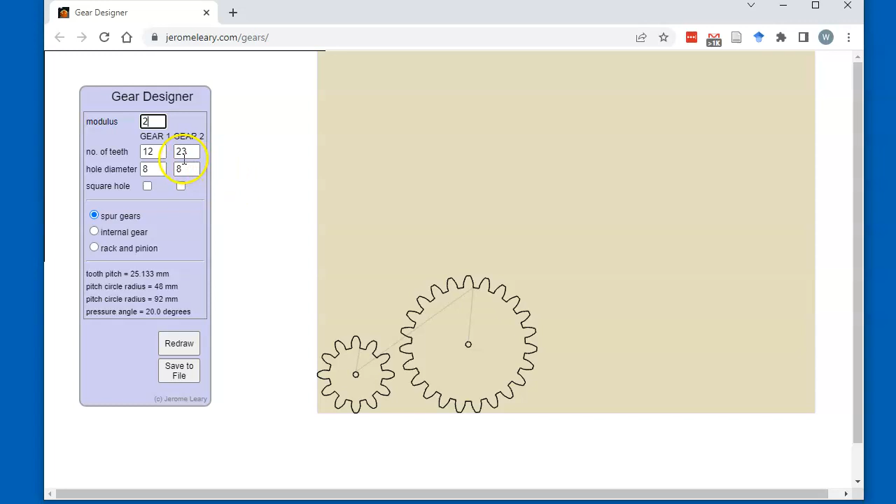I'm going to do a gear with 24 teeth, and I'll put the hole in the middle at 4 millimeters, which matches the hole size for a number of different motors. You can do spur gears, internal gears, or rack and pinions.

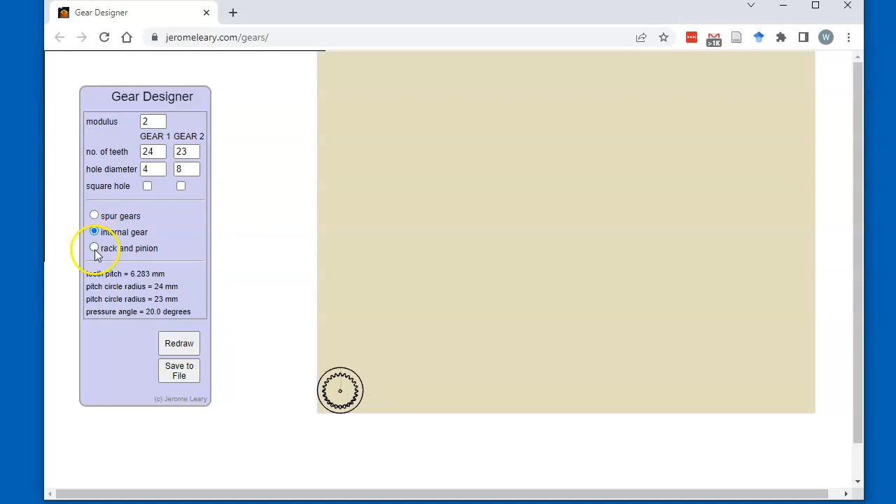So we're going to do spur gears, and let's just zoom in a little bit so we can see our gear. Because I only want to do one gear, I'm going to set this second one to 0 teeth, which makes that gear disappear.

Now my gear shape is all set, and I can save it to a file, saved as a DXF file. I just noticed that the second gear still has the hole in it, so let me change the hole diameter to 0 on that second gear.

Now that second gear completely goes away, so I'll resave it to the file, and then go ahead and rename that gear.dxf.

If you want, you can take a look at your DXF file. In this case, I'm using the application eDrawings and opened up that file, now renamed to gear.dxf, and it looks pretty good - you can see the involute tooth shape.

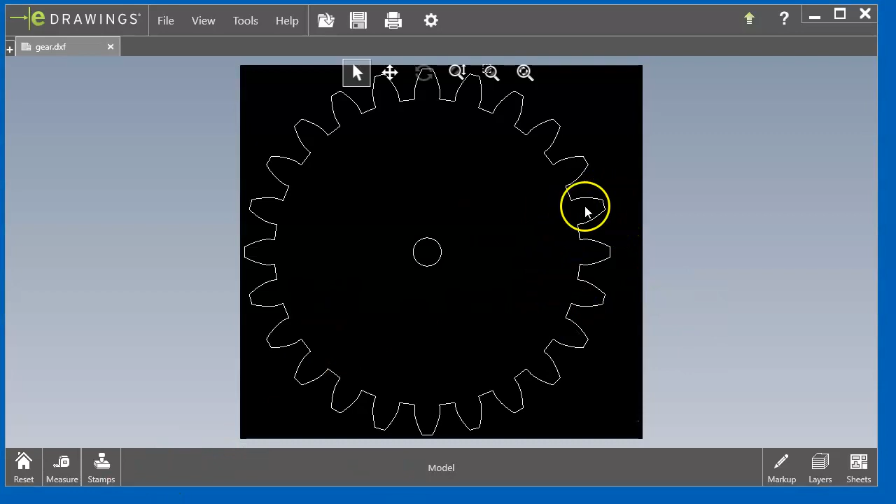If you go ahead and measure the diameter of the hole, you'll see that it's diameter 4 inches. That's because it doesn't yet know that we're thinking about millimeters rather than inches. So when we go to Creo, we'll have to change the default units to millimeters.

Now we're in Creo, so the first thing we're going to do is set the working directory. I've got that file in a directory called Gear Demo, so I'll set that to be the working directory.

And then you can see that gear.dxf in the file. We're going to go ahead and open and look for DXF files, and the gear appears, so we'll click on that and then import.

For the import new model, there's a couple things we want to do. First, we want to import as a part, then go under details of the current profiles, and under the curve tab, import as a set of curves. Click OK on the import, then just check that the import type is curve, and click OK.

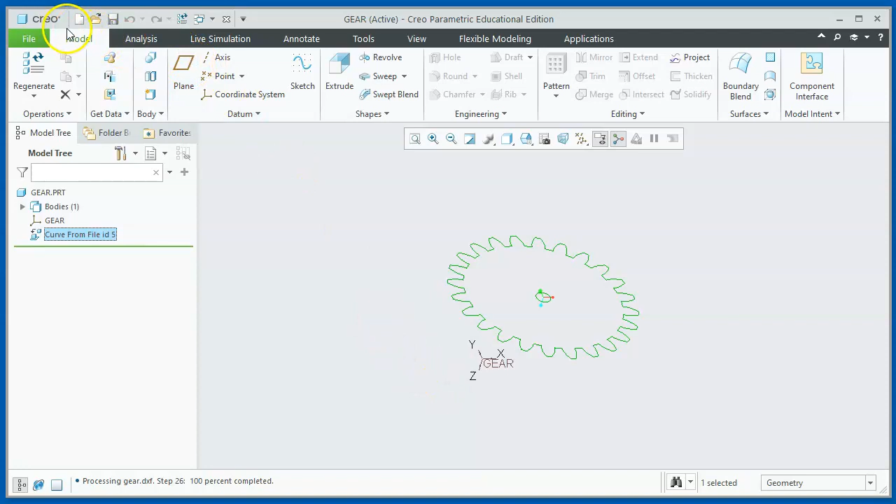To extrude it, we first have to define a plane that's in the same plane as this shape to extrude from. So we go up under Model, then Datum, and click the plane. It's asking where to place it, so just click on any part of that gear shape you've imported, and that'll put down a plane that's in the same plane as the gear shape. Now we click OK.

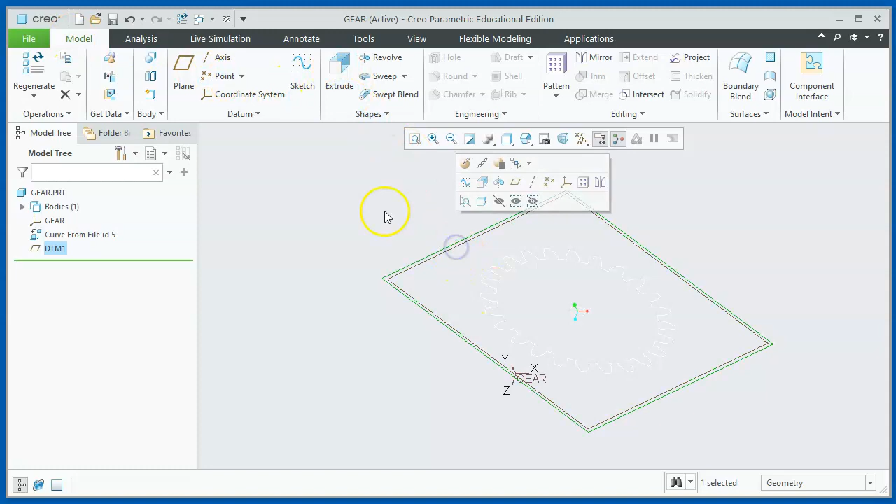So next, we're going to extrude. Go to Model, Extrude. The plane is already selected - here we can select the plane, and then Extrude. Now we're in the sketcher and extruding on the plane of the gear.

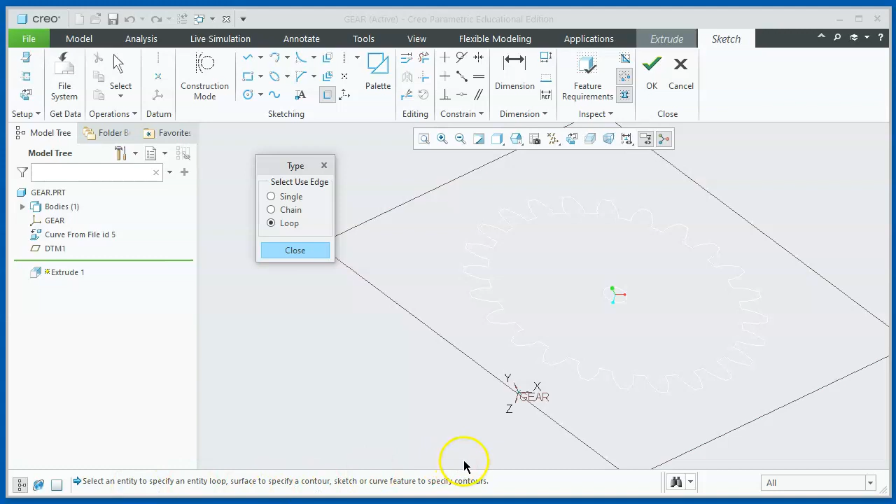Now under the sketching tool, we go to the project tool, and there's a little dialog that pops up for type - we want to select type as loop. Then it's asking us to select entities in the loop, so just go in and click on any part of that curve of the gear, then click on the hole, then hit close for the type, and you can click OK for the sketcher.

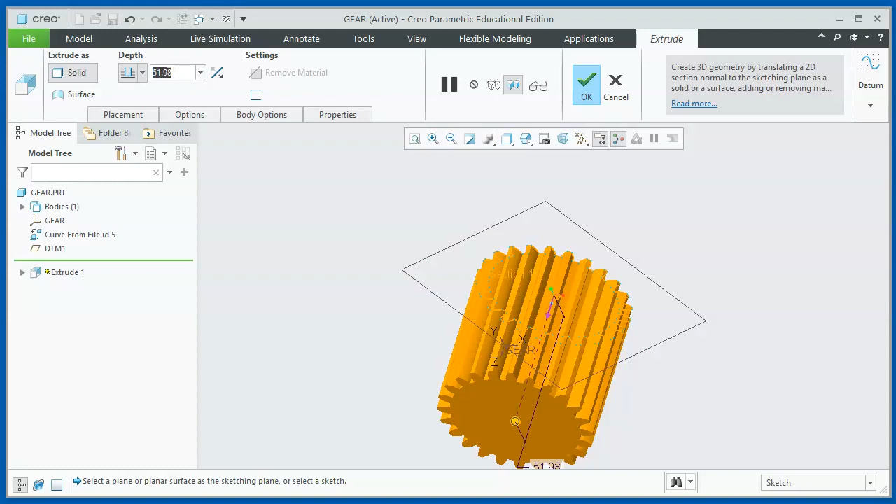Now that puts us back into the extrude dialog, and then we can pick the thickness of the gear, which in this case we'll make 10 millimeters thick. Click OK, and there is our gear all set to go.

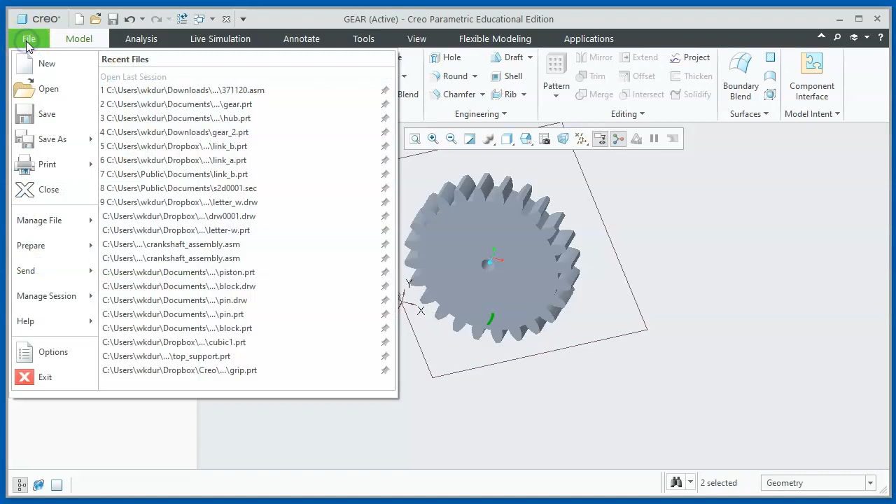Now the one thing I haven't done is change the units to millimeters, so let's go do that. Under File, Prepare, Model Properties, and then under Units, the default is set up as inches, so we want to change that. In the Units Manager, change it to millimeters.

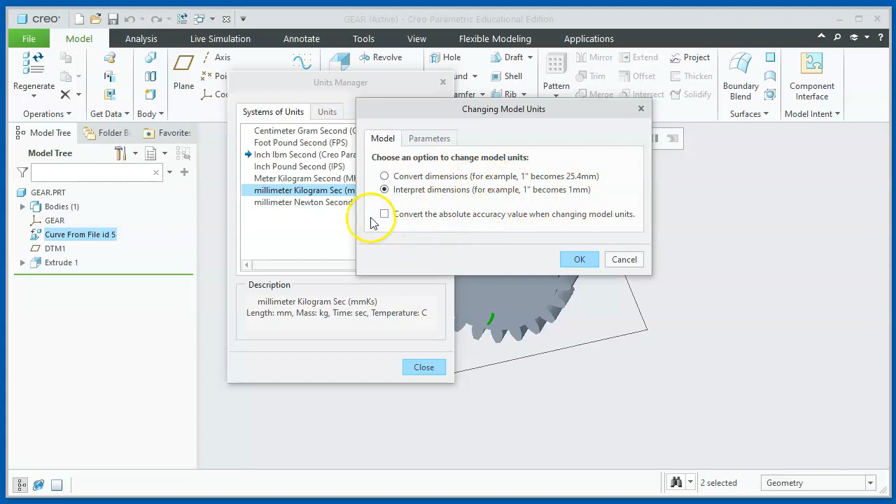It's asking us, since we're changing the model units, whether we want to interpret dimensions so that 1 inch becomes 1 millimeter, and then uncheck convert the absolute accuracy value. We'll click OK there and close the units, and now we're interpreting in millimeters.

Just to check that things are okay size-wise, we can go into Analysis, click on the measuring tool, measure distance, and then go from a point on one side, press the control key, point on the other side, and this gear is 43, 44-ish millimeters across, so it's the right size.

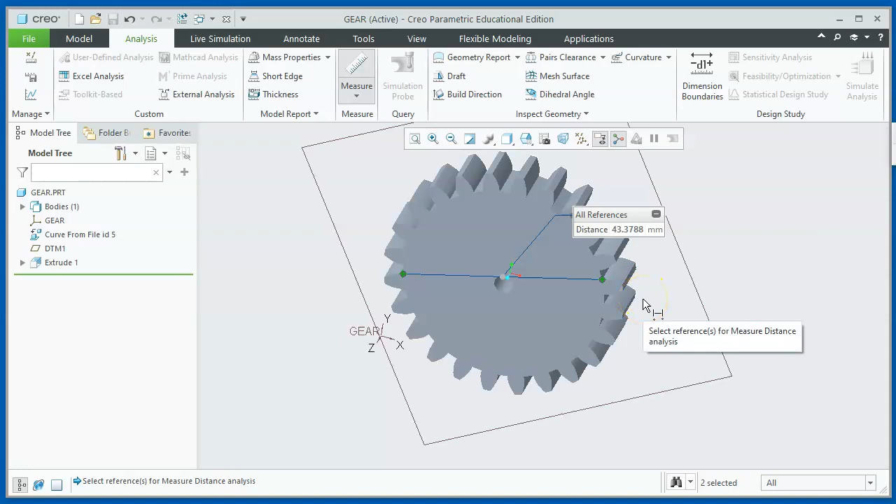So you could go ahead and export this as an STL file to bring it over to your 3D printing software. But let's say we wanted to add a hub to the gear to give a little bit more surface area for the motor shaft to grab onto. So let's go ahead and add a hub.

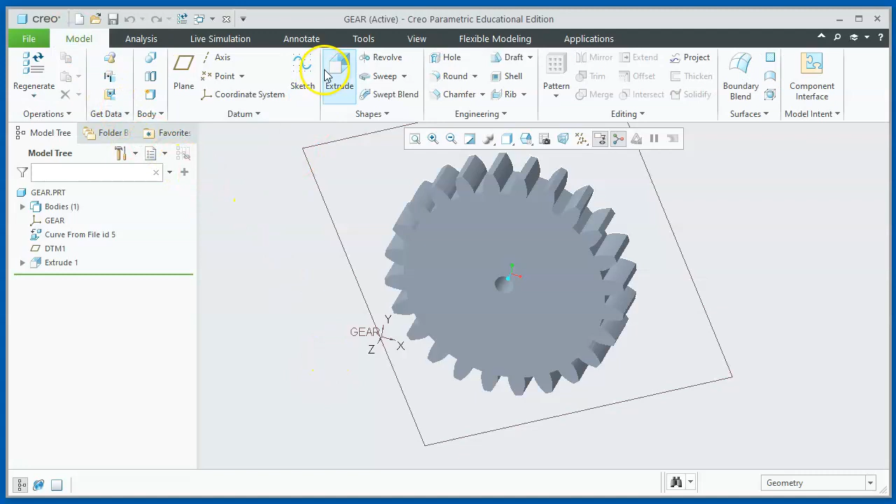For that, I'll do Model, then Extrude, and we want to pick the surface of the gear as what to extrude from. Then we're in the sketcher, so we'll go to Setup, which takes us looking straight down on the gear. We're going to do a hub, basically a cylinder with a hole in it that's centered around the hole of the gear.

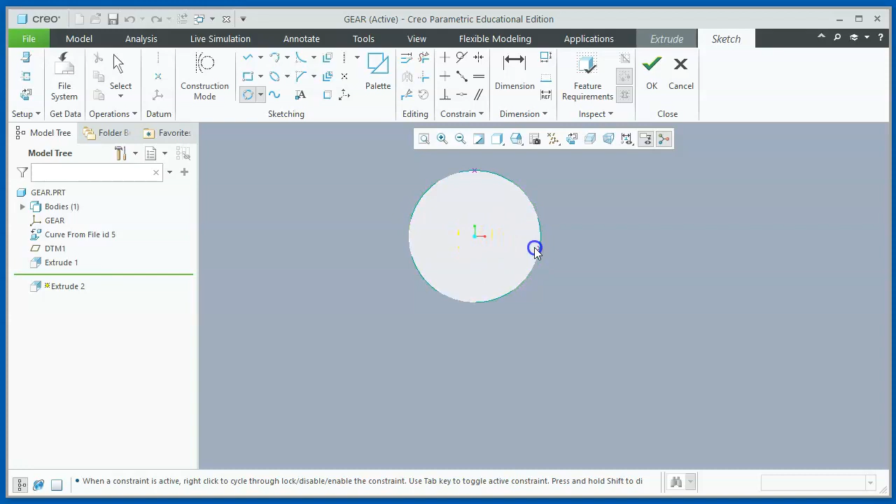Let's start with a 3-point circle, and we'll pick 3 points on the surface of the center hole, because it doesn't yet have the center of that hole as a datum feature. We'll click again there, and again there, and that gives us a circle that sits right on top of the hole in the middle of the gear.

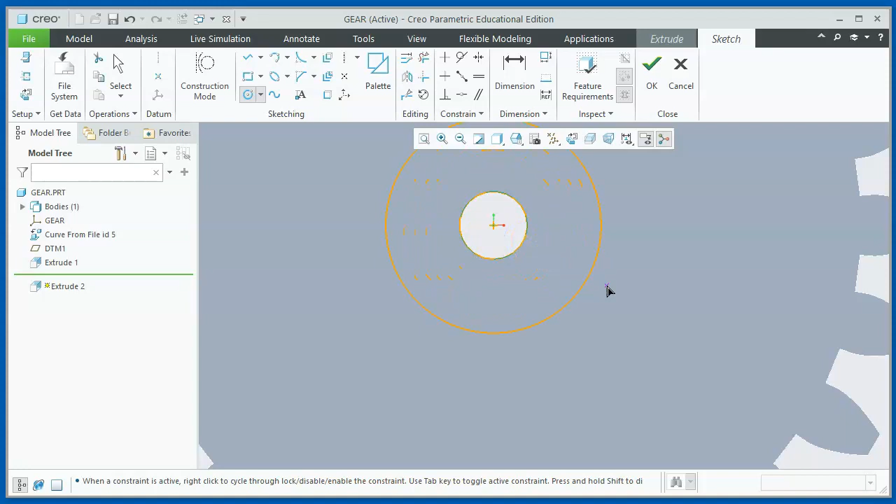Then we're going to do another circle, in this case a center-and-point circle, because now we've got a reference that's the exact middle. We'll pull that out and make that a diameter of, let's try it, 10 millimeter hub.

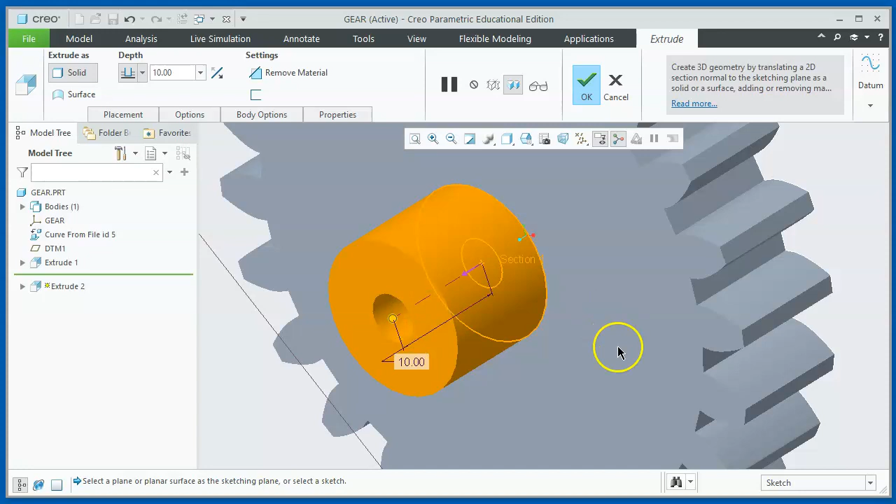Okay, so that looks pretty good. We'll click OK, and then we'll make this a 10 millimeter thick hub. And that is looking about what we want, so we click OK.

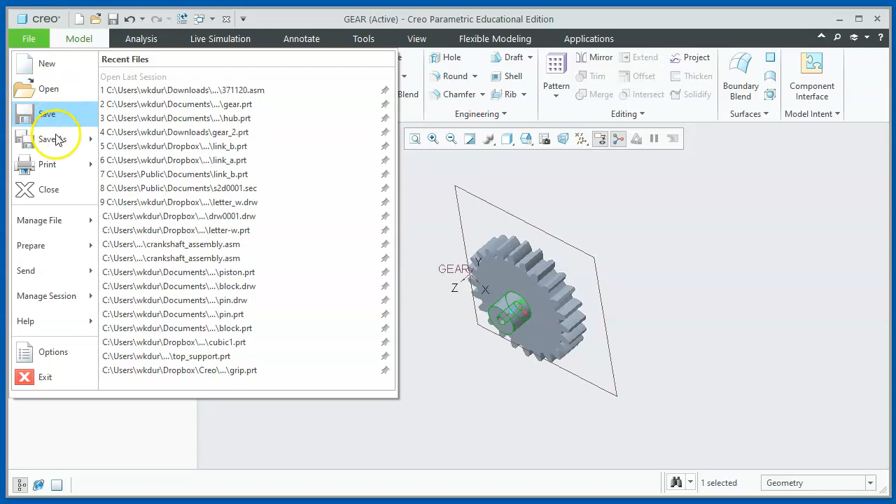That's a pretty good looking gear to go ahead and bring into our 3D printing software. For making the STL file, we do File, Save As, Save a Copy, and then under the type, we look for the STL type, which is right here under stereolithography. Click OK, and that creates our STL file that we can bring into our 3D print software.

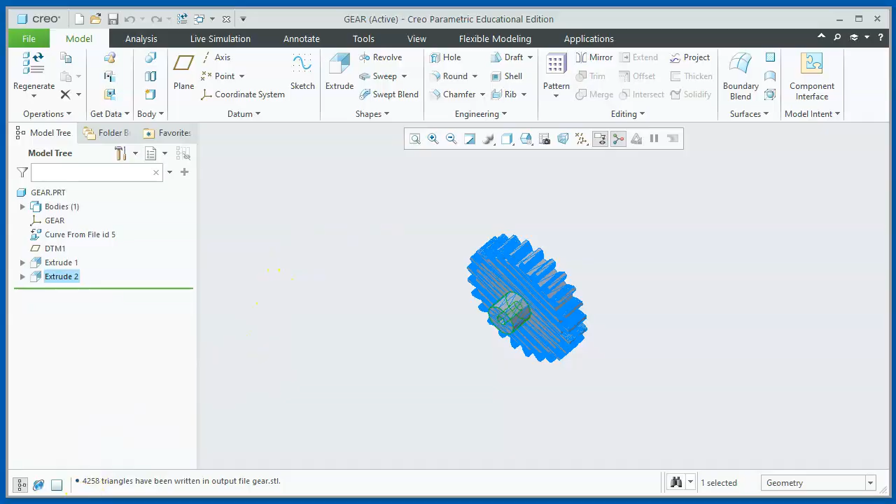Okay, I've moved that IGES file to my working directory, and we'll click Open and look for IGES files. IGES is an industry standard for converting CAD files. And there's our IGES file, so I'll click and import.

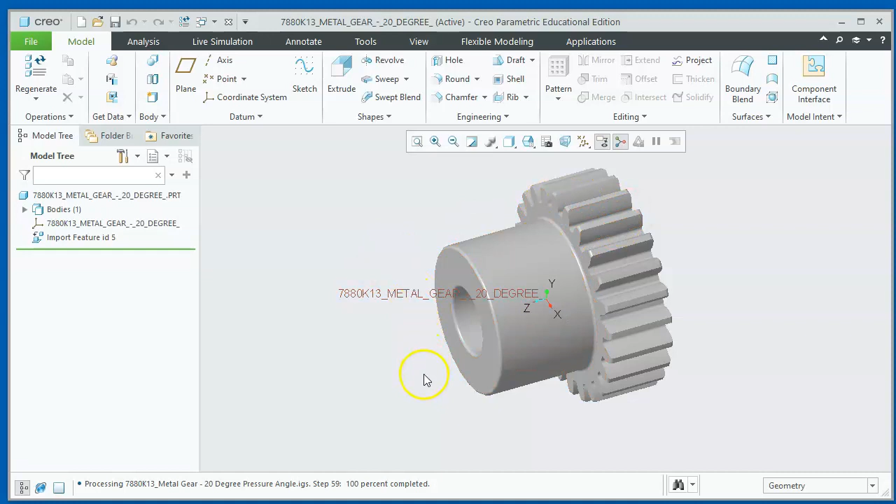As a part, and then click OK. Then we've got that part right here in Creo, and it's just a single part, so it's not a bunch of components, but you can go ahead and add things to it, drill holes in it, or take it straight from here into a 3D print file.

So again, Save As, Save a Copy, and then type, stereolithography, OK, and that creates a file that's ready to take over to your 3D printer.

So there's a couple of ways of creating gear shapes and bringing them up into Creo, making any modifications in Creo that you want, and then exporting for your 3D print machine.